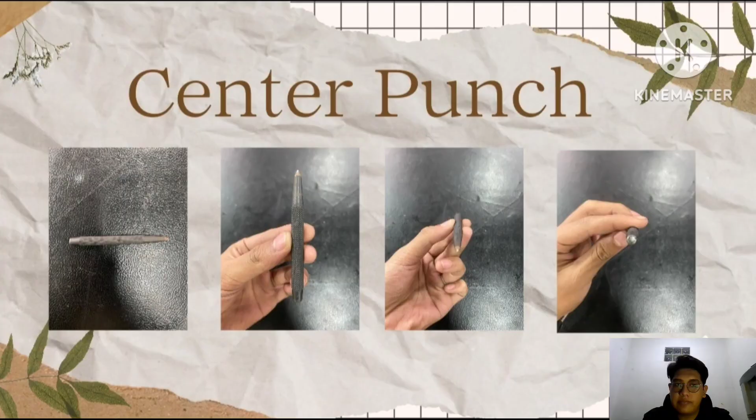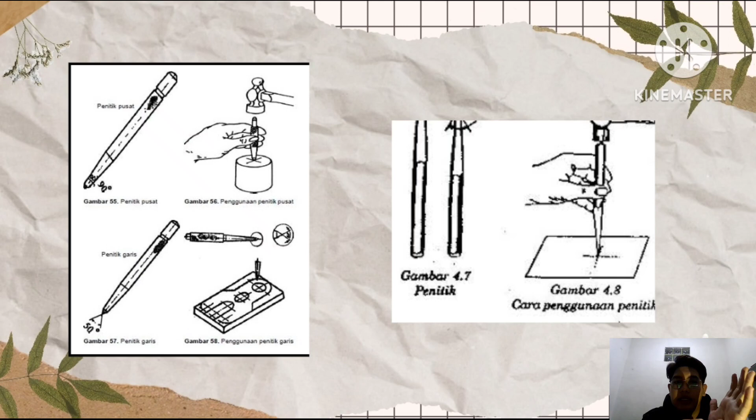Center punch is an indispensable tool for the manufacturing world. It is also a marker for the boundaries of cutting work and a marker for drilling. A center punch has a shape almost the same as a scriber but larger in diameter, and at one end is made pointed while the other is made flat.

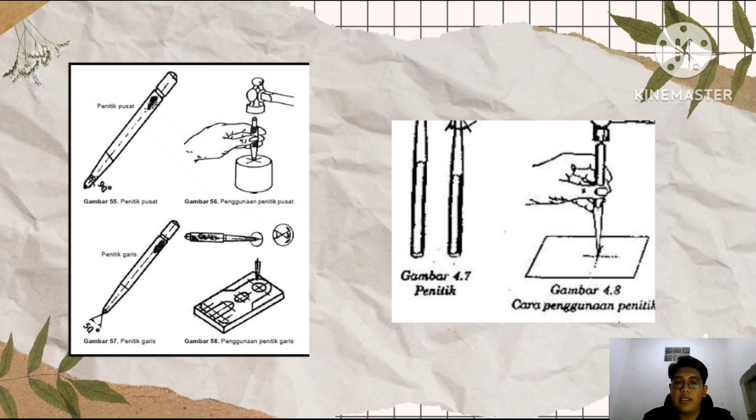Usually the material used to make a center punch is ST37. Making a center punch requires accuracy and focus, because the center punch has a size that can be considered small. Below we present how to make a center punch according to standard procedure.

First of all, we enter the discussion of safety work, which is an effort that must be made by a worker when doing work. This safety work is very prioritized when doing work, to avoid work accidents.

What are the things that must be prepared, especially to make a center punch? What must be prepared is personal protective equipment, or PPE, which is used especially at Polman Bandung.

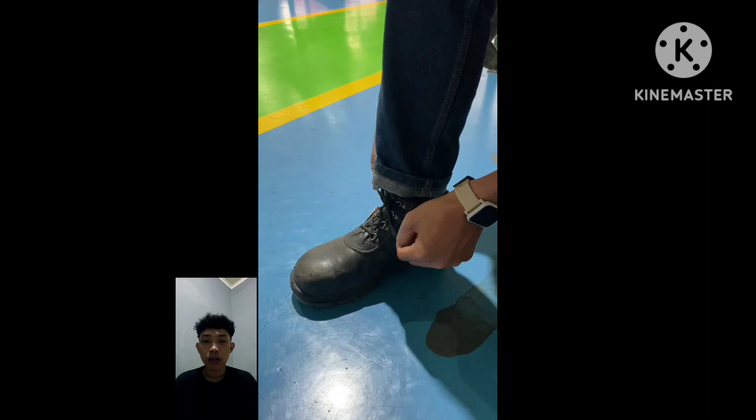Such as workshop clothes—if the sleeves are too long, they should be folded to avoid unwanted accidents—safety shoes, and safety glasses.

Note for women: if using the hijab, then the hijab should still be worn properly, and for those who do not use the hijab and have long hair, it is mandatory to tie it up.

The second is a discussion of the tools and material used during the center punch manufacture process. The material used to make the center punch, ST37, is low carbon steel.

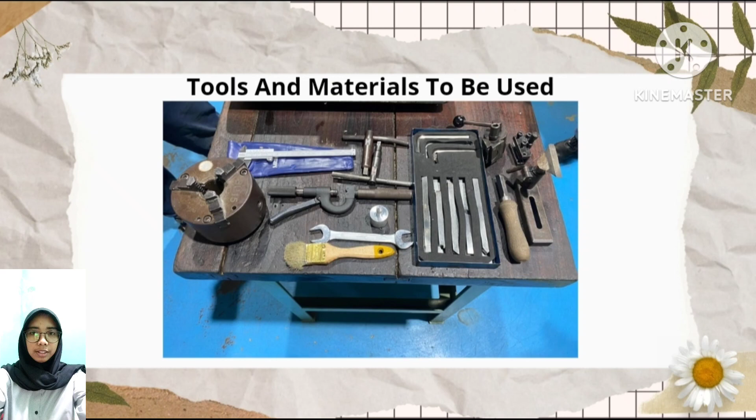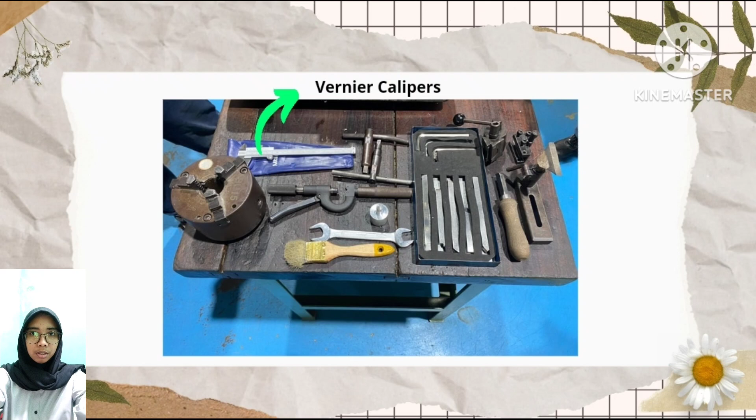For the tool itself, we use several kinds of tools. One, vernier caliper to measure the workpiece. Two, flat edge chisel, which is for facing, tapering, and elongated feeding.

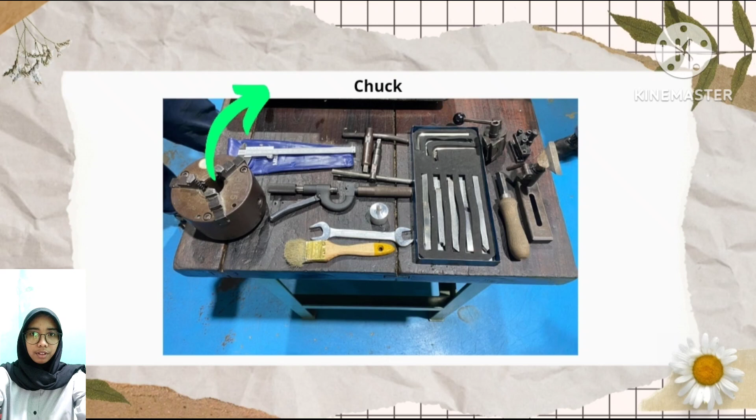Three, chuck for gripping the workpiece. Four, chuck key to tighten the chuck that will grip the workpiece. Five, kartel or knurl, for making straight or intersecting circular grooves on the outer or inner surface of a workpiece.

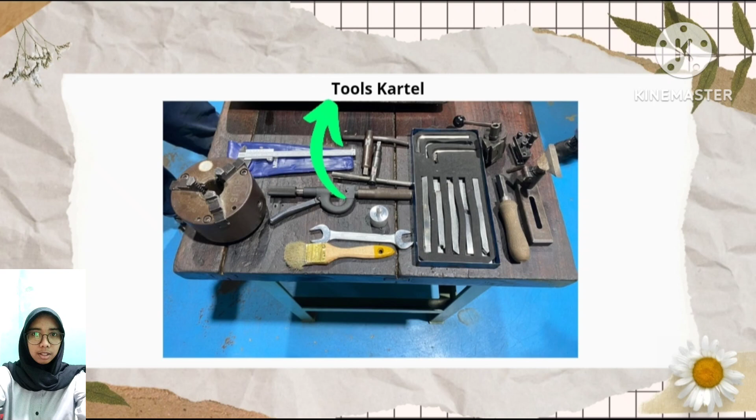The goal is that the surface of the part is not slippery when holding it. Six, wrench to tighten the chuck on the spindle part. Seven, brush to clean the surface of the chips that stick during the work.

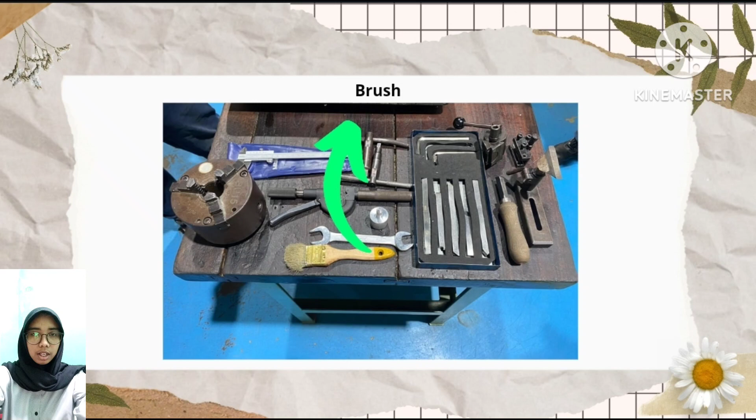Eight, hand radius chisel for manually creating a radius. Nine, chisel stand for support when using a hand radius chisel.

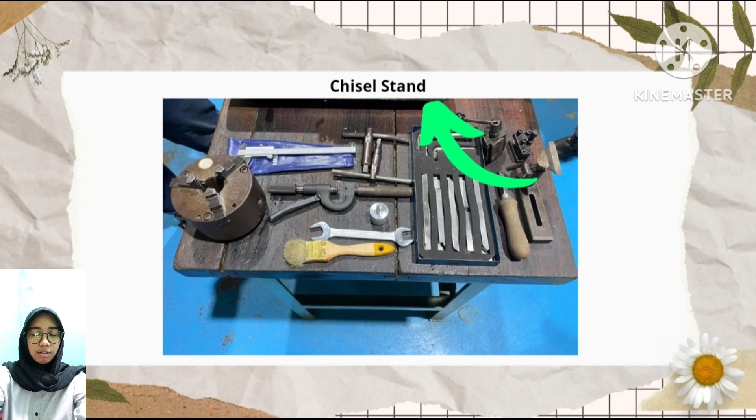The third is about the working method used to make the center punch. The first step is to secure the workpiece to the chuck.

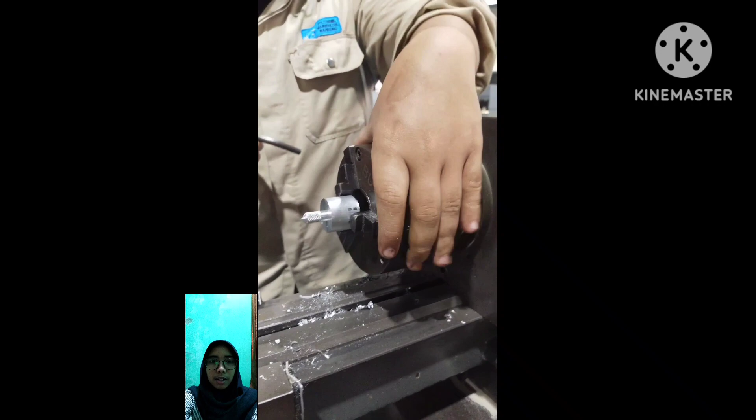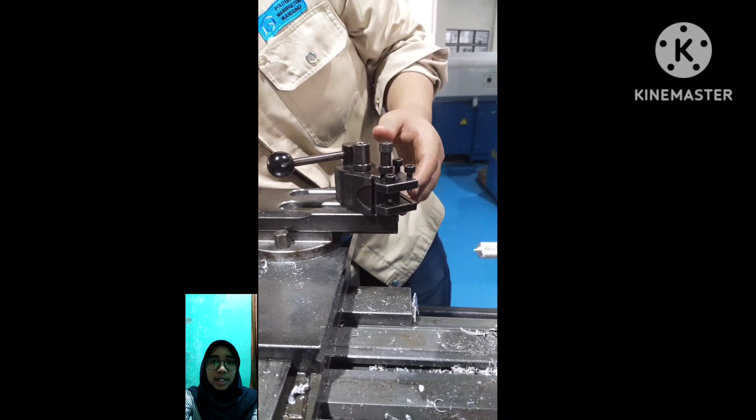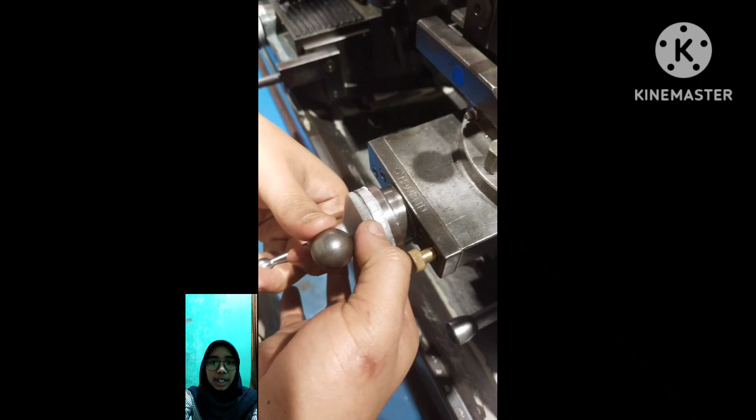Step 2, facing with a flat edge chisel by approaching the chisel to the workpiece and feeding to the end of the workpiece, then setting zero on the side.

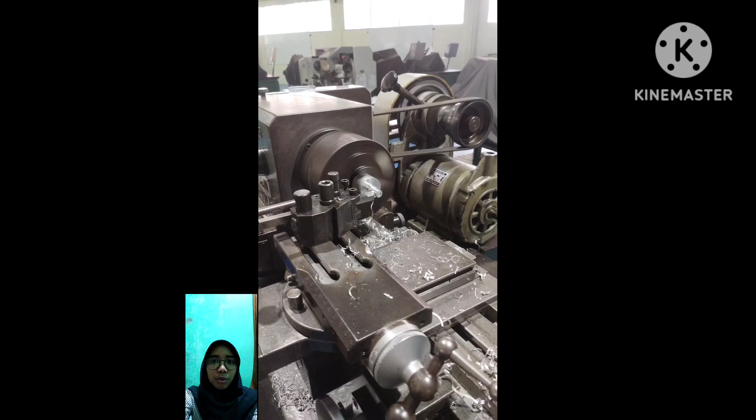Step 3, enter the size according to the work drawing by touching the chisel to the workpiece and then rotating the sled until it reaches the size.

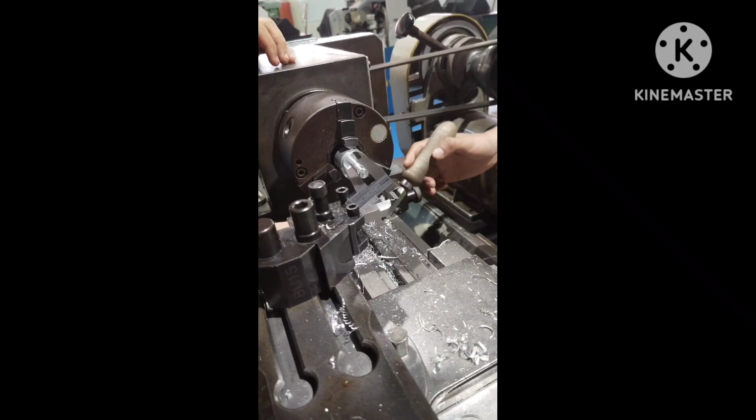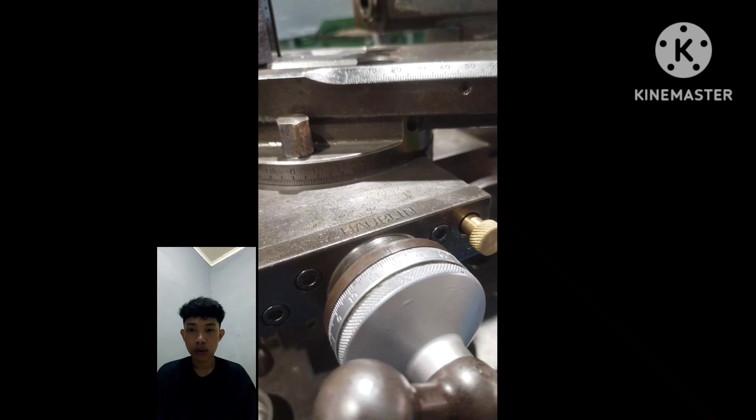Step 4, make the profile by rotating the slide according to the work drawing and do the first profile work.

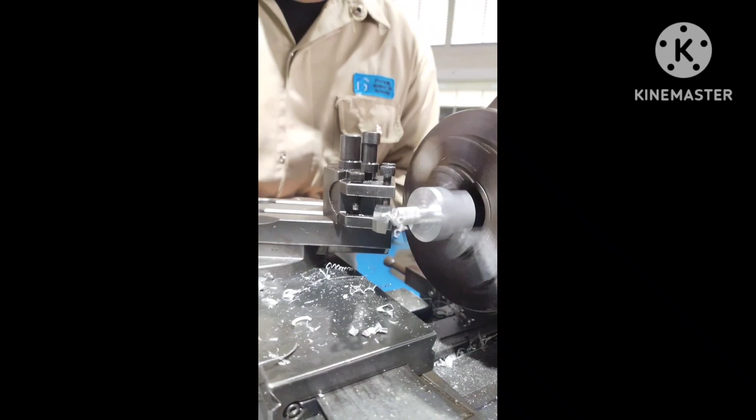Step 5, make a radius profile by mounting the radius tool holder and radius tool, then do the radius process.

Step 6, make the knurl profile by engaging the workpiece with the hand knurling tool and then do the knurling process.

Step 7, perform the tapering process for the tapered profile by tilting the slide according to the work drawing and perform the tapered profile process.

Step 8, do a chamfer process to remove the sharp side on the workpiece.